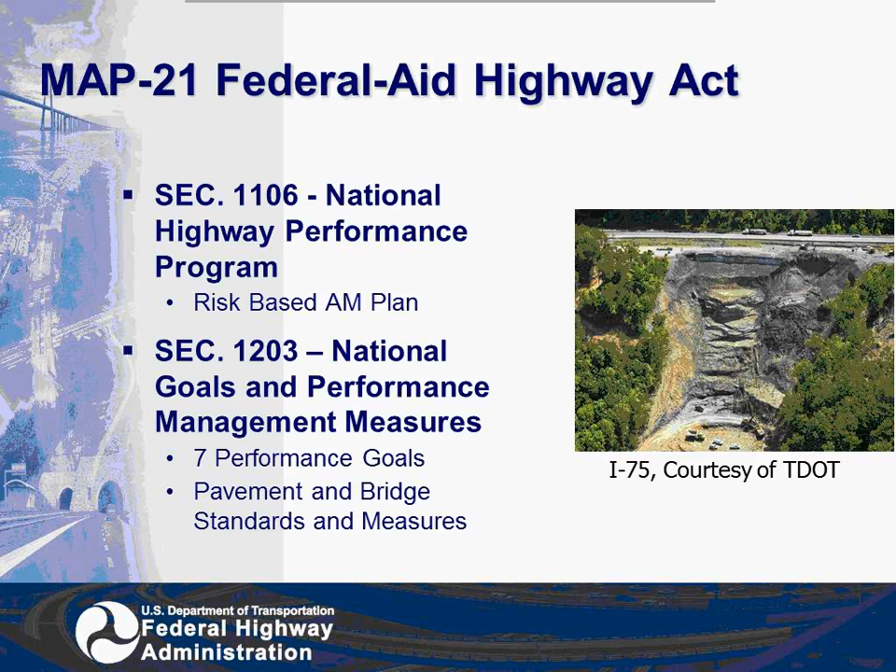We've been doing this a while with pavement and bridges. You could argue for a while about whether these are good measures, but we've been reporting—this is an old DOT report to Congress about conditions of these types of assets for some time. It's really a good thing the legislation didn't require something of geotechnical, because other than perhaps the design factor of safety, we don't have any standards and metrics that we could be working towards.

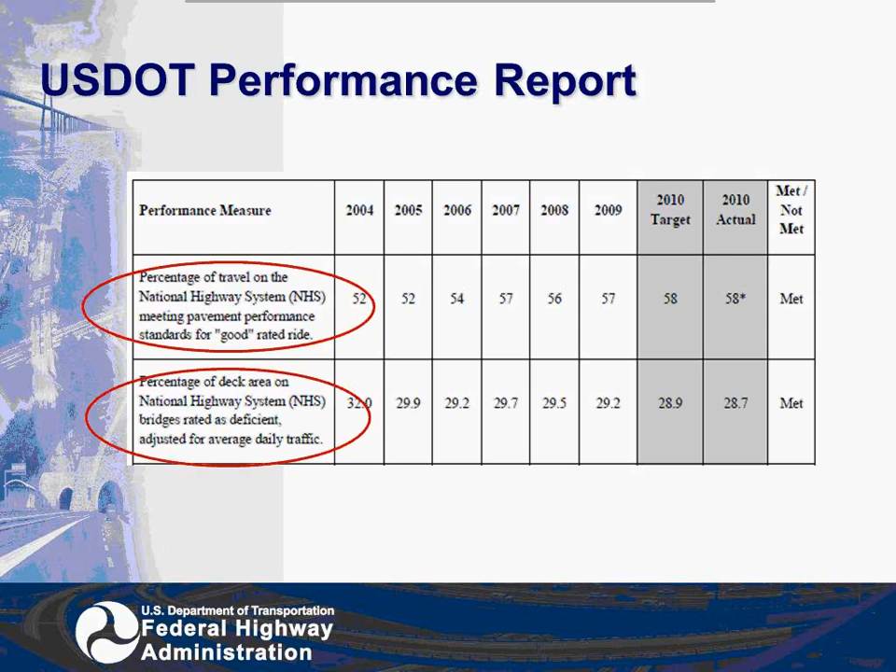I think it's also important to look at a little historical perspective of how we got here. Not all of these things came from the same place. If you look historically, back in '68, following the Silver Bridge failure in '67, the National Bridge Inventory was established. It was based on solving a safety issue first—to ensure we have safe bridges for the public. About 20 years later, ISTEA in '91 was the first pavement management, and that was a fiscal responsibility, recognizing there's a lot of money going into pavements and that we need to be especially careful in managing such a big dollar item. 20 years later or so again, here we are at MAP 21, and we're defining performance now. And performance is multifaceted—there are many goals.

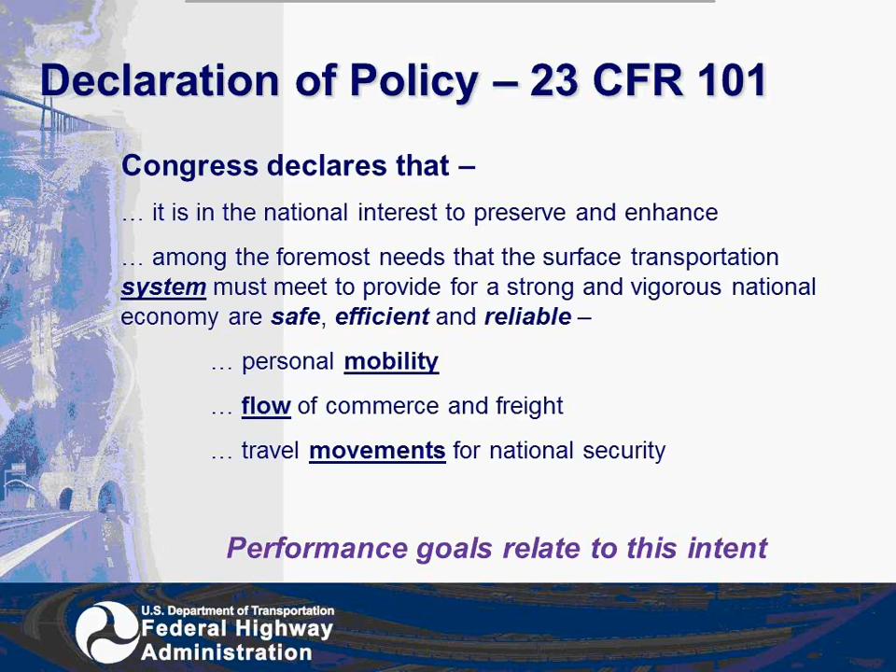So what's the intent here? This is Congress's language with my emphasis added. If you just look at the emphasized words, you can see that Congress has in mind a safe, efficient, and reliable system that helps mobility, its flow, its movements, and so on. The performance goals relate to this intent.

Risk causes these goals not to be met. The bridge and pavement measures can't do it all.

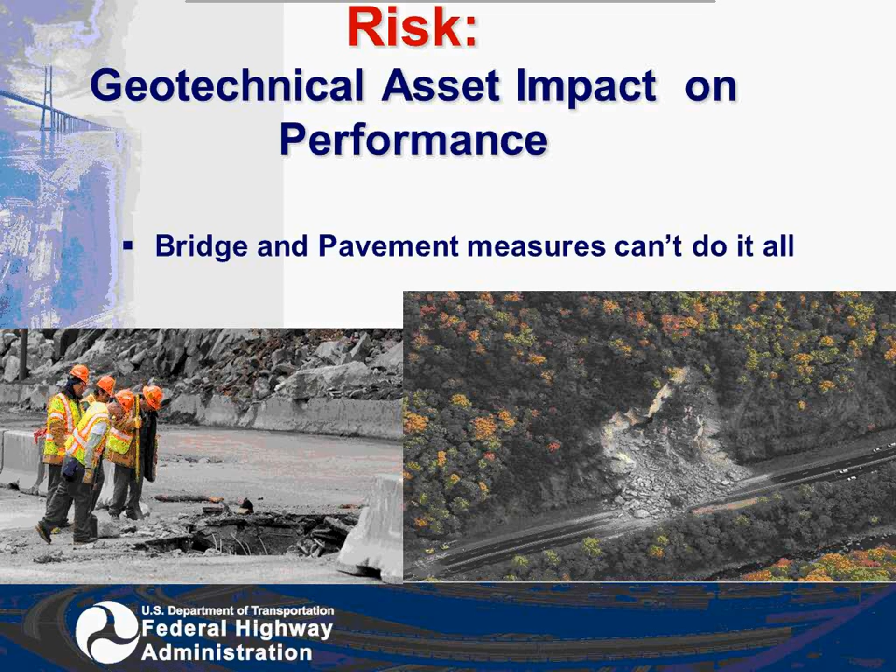This is I-40 in North Carolina. Again, pavement here might have been in fine condition until this rock slide came down. Both these corridors are now impassable, and that's clearly pretty poor performance.

This is an entire embankment section lost on, I believe, 441 in North Carolina at the Great Smoky Mountains, which actually provided access for Tennessee towns that thrive on the livelihood tourism brings there. Entire section lost.

Here's a tunnel that was discovered in Colorado just between Vail and Leadville in the peak tourist season. It fortunately daylighted just outside of the pavement section, but it goes right underneath the pavement, unknown until it surfaced.

Here's a retaining wall between US 6 on the left and I-70 above it, a wall that wasn't maintained or managed until it became such an issue that it required a $10 million repair that impacted both highways.

This slide from Taiwan a couple years ago maybe says it best. You've got tunnels at the very top of the pictures, plenty of bridge structures, embankments, other kinds of earthwork, and pavement in between, and it's quite clear this is not a viable transportation corridor.

So the thesis we're presenting today, by my talk and those that follow, is that systems for safe and efficient, reliable mobility are made up from corridors, and corridors are kind of a special asset because it's the management of a corridor that could ensure that the goals of MAP 21 are met.

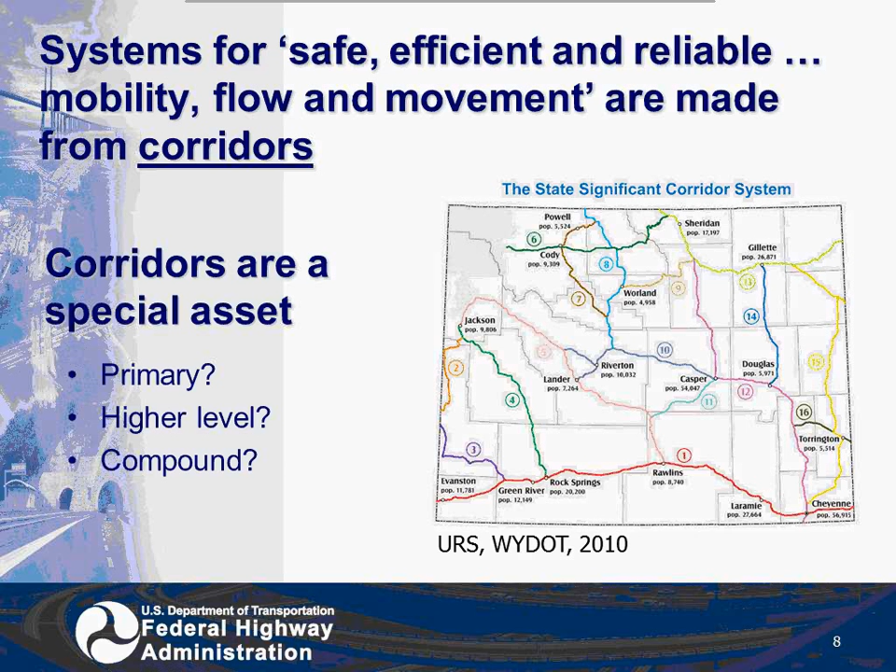It could ensure that we have this mobile system. Other assets can't quite get us there, so maybe it's a higher level asset, or you can call it what you will, but that's the idea. Systems are made up from these corridors as components. An example from Wyoming is shown.

So corridors are like chains. Each link is an asset, or maybe it could be called a feature or something like that. And of course, when a corridor crosses a valley or a ravine, it's crossed by a bridge structure, and in between it's got pavement types from A to B and B to C and so on.

But corridors also cross mountains, using cuts, fills, and retaining walls. And corridors also cross geohazards like sinkholes, abandoned mines, swelling soils, and collapsible soils. So corridors have a lot of different links to them, and corridors break like chains do as well.

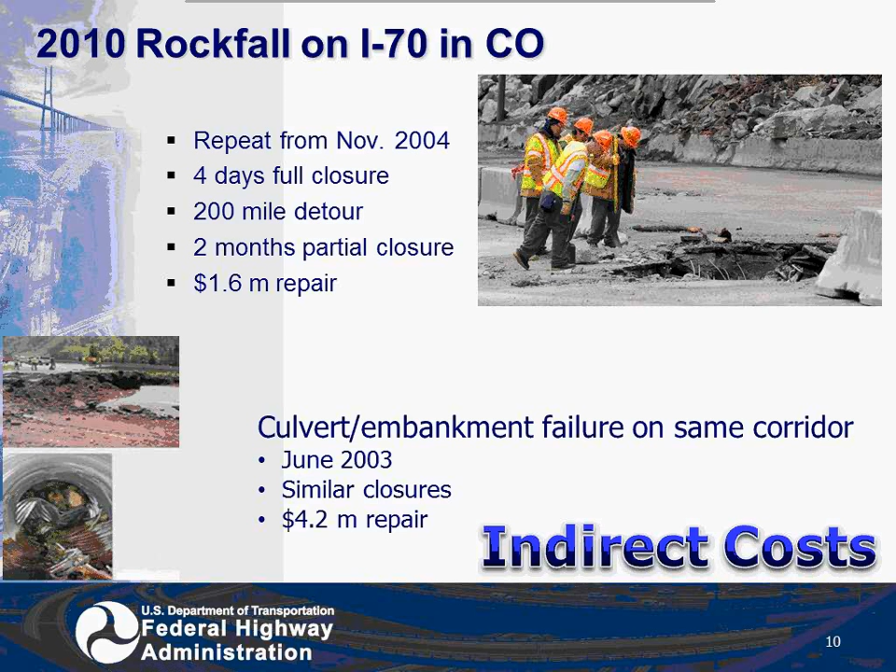Just a couple examples to show what we've learned about where the costs are here. This is I-70 again in Colorado. You've seen that upper picture, but the point on this slide is that I-70 in Colorado closes every few years because of a geotechnical, or let me say a non-pavement, non-bridge asset problem, and it closes the highway. CDOT estimates it costs about $800,000 a day to close the interstate.

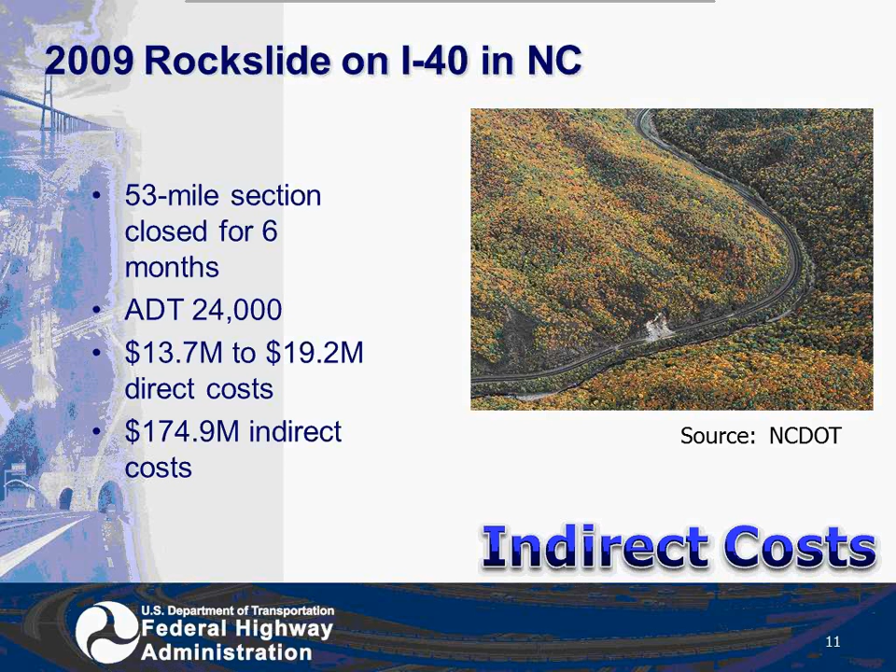In the 2009 rock slide on I-40 North Carolina, which you've seen this photo of as well, a little bit more in-depth study in terms of cost was done, and basically it works out to be about $1 million a day, even though this one has a lower ADT than I-70 in Colorado. So the failures are dramatic. They look like there'd be big safety issues, and when there are safety issues, they're tragic. But really the big deal is the cost of closing the system. And $1 million a day for an interstate...

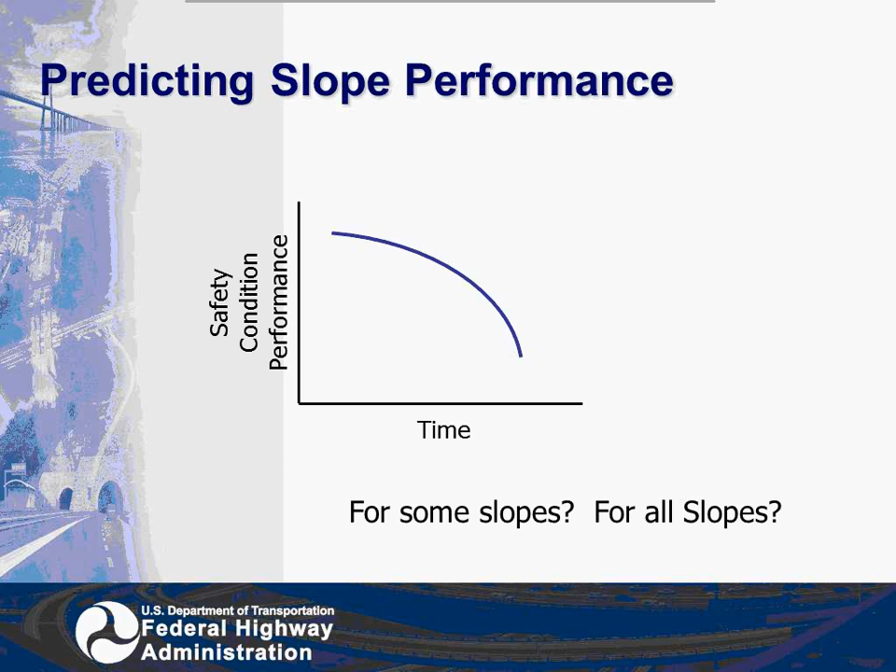Geotechnical issues that are related to inventories and definitions, forecasts and models, expectations for standards and measures, and we're going to learn from some experiences. We really have a lot we need to do. If you think about pavement, for example, most states have one or more of these types of pavement deterioration curves that they use to manage their pavements. We don't know, for example, if when we're looking at slopes, whether we have the same type of curve. Do we have it for all slopes? Do we have it for some slopes, some geologic settings, some climates, some aspects, etc.?

It may actually be that in predicting slope performance, the impact of natural events makes it a pretty noisy curve. It might have the same trend, but it might be hard to see the impacts of preservation activities in this type of relationship. This is what we need to learn.

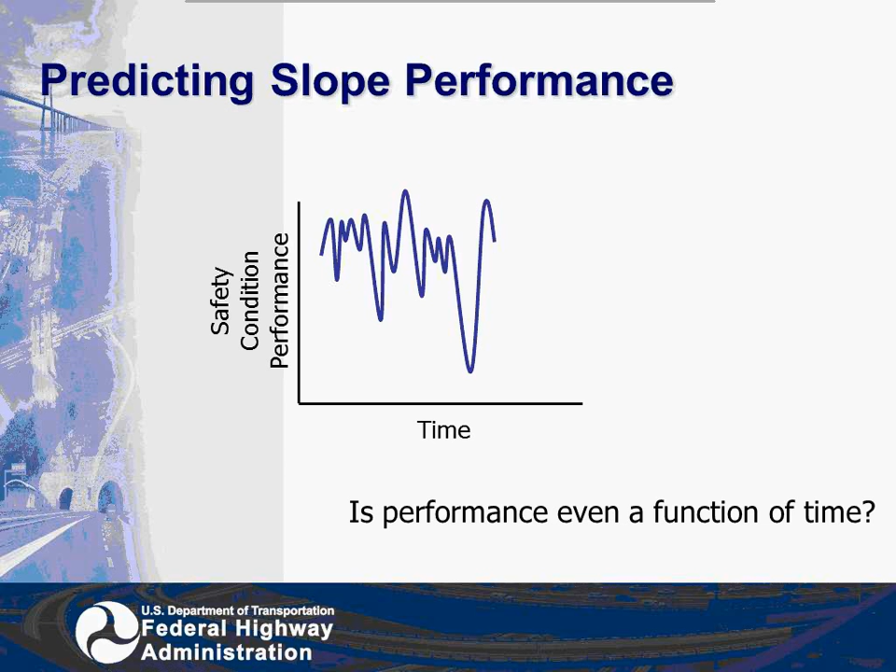It could actually be that extreme rare events really have a dominant influence on the way some of our geotechnical features perform, and that's also something we need to discover. In this case, we're really looking at the risk introduced by, you can easily picture it in terms of an earthquake or something like that. A recurrence interval type risk management approach is what would be required.

So what I want to leave you with today are some points to carry forward as we go through the following presentations. Corridors are built from links of a chain, and they are the real asset of a state highway agency or someone else who owns roadway systems. Geotechnical features are links in this corridor, and the system the owner has is built from a series of these corridors.

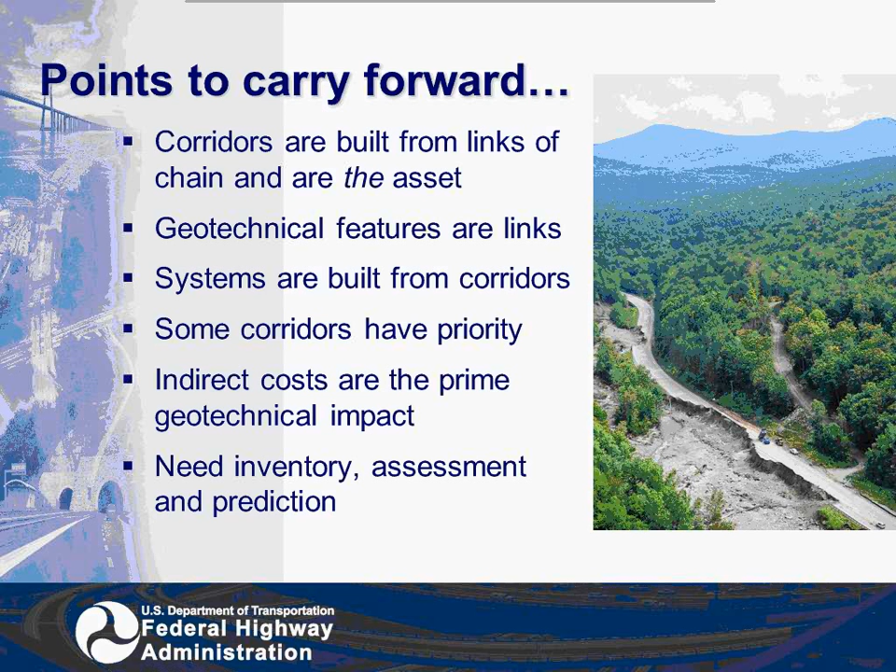Another important point here is that some corridors have priority. This matters because one of the challenges in managing geotechnical assets is the time-consuming business of getting inventory and condition assessment on these features, which heretofore haven't really been managed. Using the priority of corridor approach, one can start to do meaningful inventory and assessment work in a logical and risk-based way.

Indirect costs are the prime geotechnical impact. Despite the dramatic look of some of these things, really the issue is closing down the roads and impacting the environment we're in. Finally, I'll leave you with the idea that we need inventory assessment and prediction developments, and that's what I see as an important and exciting part of the geotechnical engineering future.

So this is what a roadmap could look like for GAM. It's a simplified version, but you can see there's a whole series of steps we will probably have to go through. As Scott mentioned, many of these GAM programs have been around for years and years. One great example is WSDOT's unstable slope management system, which Tom Badger will talk about in a little bit. But these predate TAM in many cases, and certainly GAM. So let's move on and talk about some of these key points.

These key issues - many of us are going to have to advocate to get a seat at the table with TAM. That's what's been going on with this group for the last couple of years, exploring what the role of GAM is and how to move forward. You may have to create a role for GAM in your agency, but it should not be a separate silo, rather integrated with the TAM development process.

How do you start? You can start by doing some research, and the best place is with the TAM guides that Matt mentioned earlier. These are easy to find, you shouldn't have trouble getting to those. As you move along, probably the very first step is to look at the 5 core questions for asset management that you can find in these guides.

The first question is: what's the current state of your physical assets? Where are you with locating these important assets and knowing the condition of them? Then you want to know what is the required level of service for these assets - what is it you want them to do? You can define this in pretty simple terms. For retaining walls, it's not too hard to think about what you want a retaining wall to do.

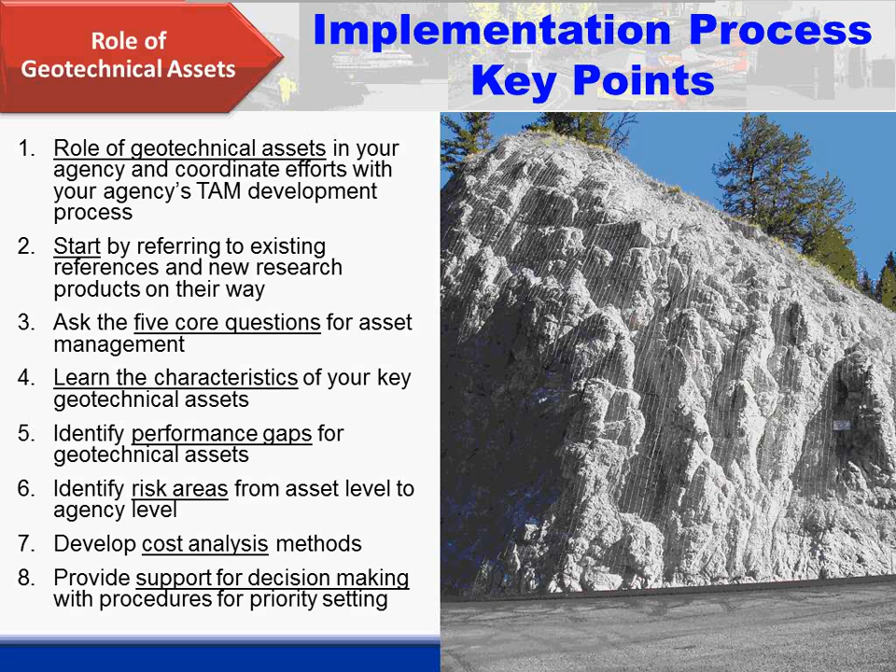The next step is learning the characteristics of your assets - this is the inventory stuff. Identifying what kind of performance gaps you have for these assets - do you have a whole class of retaining walls that aren't working the way you want them to? Then that segues into risk, and you need to identify risk areas for these assets. This can be low-level, asset level, and all the way up through the agency decision-making tree.

Cost analysis is going to be very important, and we're not very far along in understanding how to do that for geotechnical assets. The whole point of all this is decision support, so we need to come up with procedures to incorporate geotechnical assets into that process.

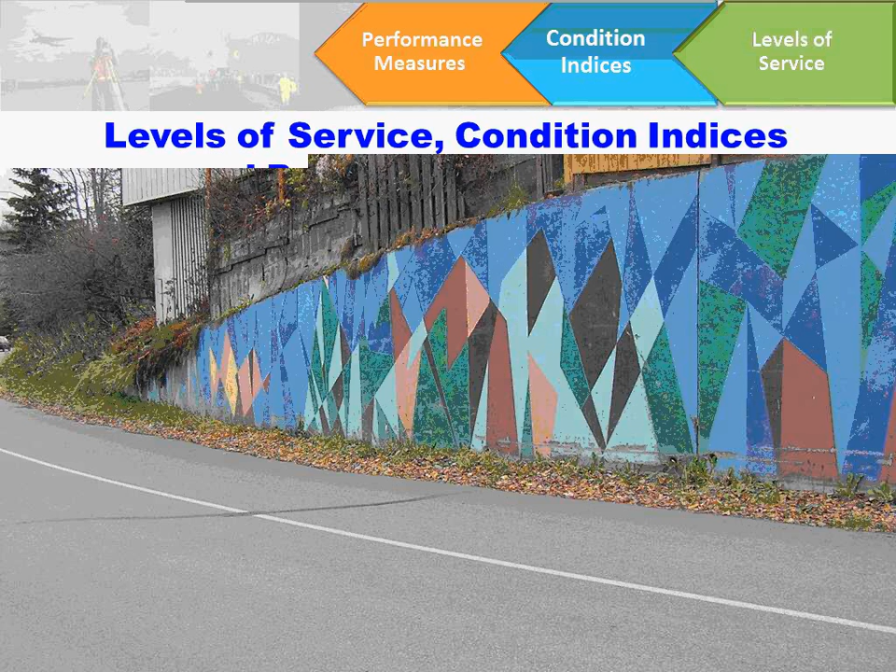Here's an example of a geotechnical asset - these retaining walls in Alaska. We don't even know where they are, much less what condition they're in. So we've started a retaining wall program, and we're going to start with inventorying them. But how do you assess the condition of this wall? Obviously the colorful part was built first, and then all this other stuff was added on top. So what's the current condition of this wall? What's the service level we're going to expect from it?

Based on its current condition, how much life does it have left? When are we going to program a replacement? These are all the kinds of questions you need to ask about many different kinds of geotechnical assets.

So these are key features: levels of service, condition indices, and performance measures. What are these things? Levels of service, again easily found in the TAM guides, are targets that the agency uses to describe a desired level of functionality. This can be some kind of maintenance and operations condition that you want to keep track of.

The next step is condition indices - basically a numerical scale applied to an asset condition. Often these conditions are based on observations, sometimes measurements, but often just observations. Examples include pavement roughness index, bridge condition, national bridge inventory, and unstable ratings, or unstable slope ratings for both risk and hazard. And the last one is the performance measures.

And what these do is represent how well an asset, or perhaps a grouping of assets in a corridor, are behaving, and whether the asset or corridor functionality is meeting the expectations of the agency and its customers and stakeholders.

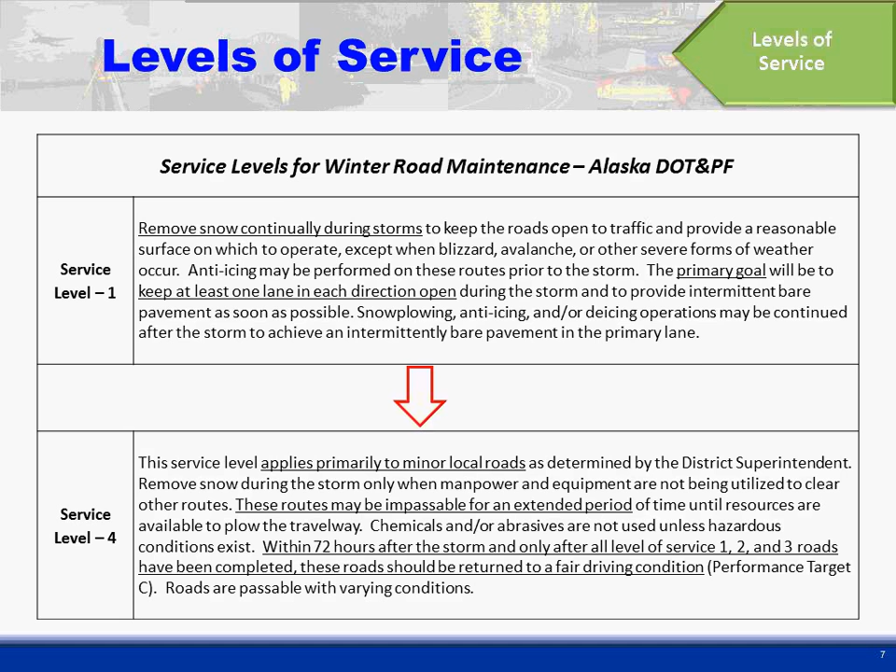This is an example of a level of service, and this is Alaska DOT winter road maintenance levels. The top one is the highest level, the best level, and it basically describes removing snow continuously during storms and keeping a lane open in each direction. And that can be pretty tricky in all of our snow states doing that kind of operations.

And then for lower level roads, here near the bottom, we've got some roads that could be impassable for extended periods during a storm. But they still have a goal, and in this case it's 72 hours, that the road should be returned to fair driving condition. So we've attached some numbers to this.

And probably in the beginning of this process for geotech assets, simpler might be better.

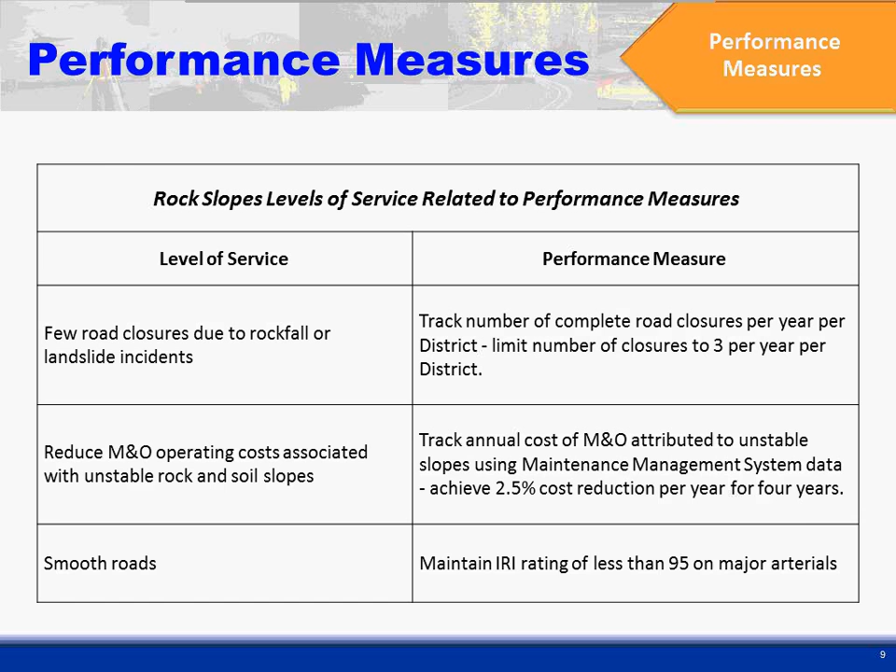So performance measures. Here we've attached, for rock slopes, levels of service and related those to a performance measure for that. These are simplified, but if you look at the top one, it's road closures due to rockfall or landslide incidents. And we can track that if we have a good relationship with our M&O people, and have a requirement to keep the limit, or to limit the number of closures to 3 a year per district. And we can track that and see how our maintenance forces are performing.

And at the bottom, it can be a little bit different kind. Level of service is just smooth roads. And we can check that with our IRI rating and pick a level that we want to meet.

And in Alaska, we're creating data web pages that have links to other databases. And I think that's a system that a lot of agencies could follow and already have done. Again, we're going to only look at these essential assets. We don't need to talk about sign reflectivity in this kind of system.

And I want to also make a point that all of the purpose of all this is to integrate all these things, the last things I talked about, service levels, condition indices, and these performance measures, so that we understand and assure that we're getting a performance of our corridor the way we want it.

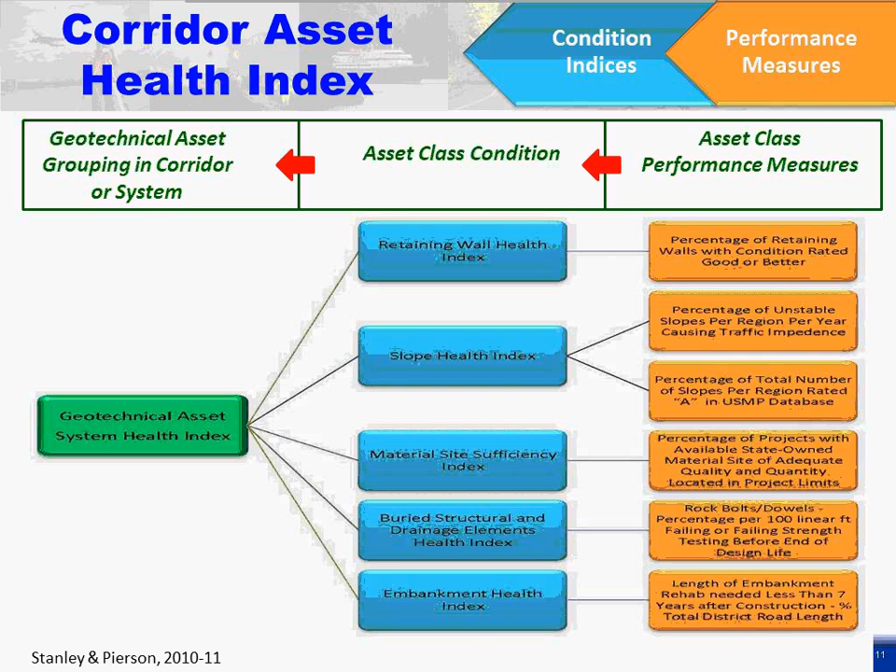And this is an illustration of how we can aggregate these things. And if we go from right to left in this, see on the right, the orange stuff is their performance measures for different kinds of asset classes, and whether it's retaining walls or unstable slopes.

And then we use the performance measures to create condition indices, which I'll just call a health index, or like in material sites, it would say material site sufficiency index. Doesn't really matter what we call it. The idea is you aggregate all these things together and weight them appropriately to get an overall rating for the corridor. Now this represents only geotechnical assets, but you can also add in other kinds of assets like bridges and pavements.

Okay, this is a flexible rockfall barrier, and just using this to introduce the topic of hazard and risk. Mark Vessely will be talking about this in a few minutes. And this is a fairly short barrier that's located in a very specific area of a pretty lengthy rock slope. And obviously there's a reason they built this thing here, but this kind of illustrates that not all geotechnical assets are made of rock and soil.

This is steel and concrete. There's wire mesh and cables and all kinds of elements here. And it's an adjunct, really, to the larger geotechnical asset, which is the slope. But why is it here?

Well, this is why it's here, because there's a whole bunch of more or less stationary assets at the bottom of the slope. Railroad tracks, there's a tourist train that stops there. The dock ends at the end of the picture down there, so nobody is going through here at a high rate of speed. And that kind of illustrates the point that location makes a difference.

What's the setting? Is it urban? Is it rural? Is there high ADT or low? All of these things are important, and we've got to develop a framework to incorporate all those things into a GAM program and a TAM program. Mark Vessely is doing some research with Shannon & Wilson for incorporating risk management into our geotechnical asset management program, which is also under development, and we can talk about that another time.

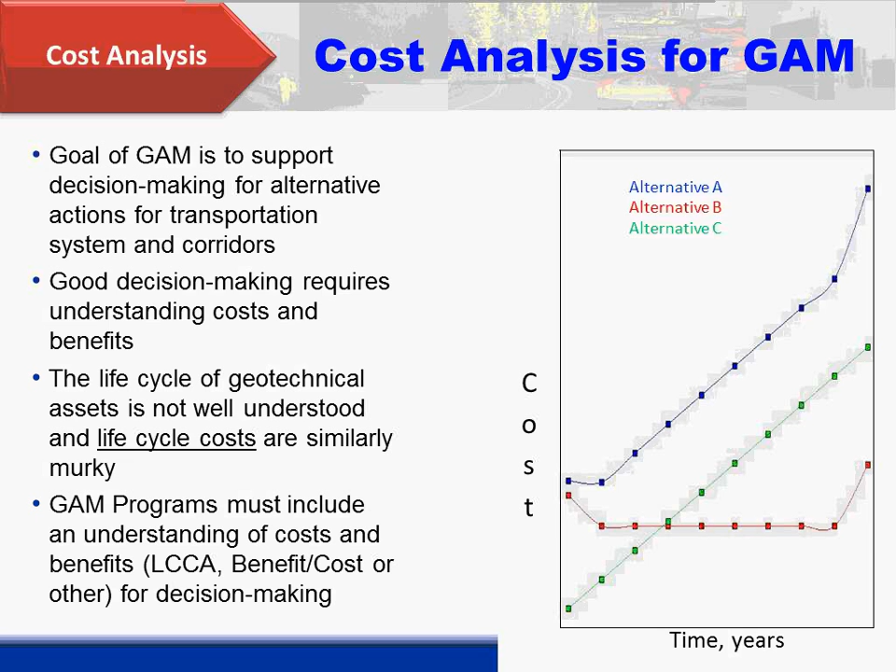Next slide, please. So now we're getting to the last topic, which is cost analysis for GAM. And again, the goal is to support decision making. So how do we do that? We have to understand the life cycle of our assets, because if we don't know that, then we can't put life cycle costs on it. And we're in a bit of a pickle right now with geotech assets because we just don't understand very well some of these assets in the life cycle. We have a lot of sort of intuitive knowledge, but we haven't really put numbers to a lot of these things, and that kind of research is underway.

So bottom line is we have to have that understanding. We have to be able to put numbers on it. We have to be able to put dollars on it so that we can participate in the decision-making process. Next slide, please.

I think a great example of this, that Tom Badger will talk about, is his unstable slope management program, where they actually do this benefit cost analysis to determine what projects are going to build. Okay, next slide, please.

So the takeaway is just get a start. There are lots of steps here, but make an effort to decide which assets are important, set up a data collection program, and start collecting inventory and condition data for these important assets. And as time goes by, we'll get better and better. Thank you for your attention.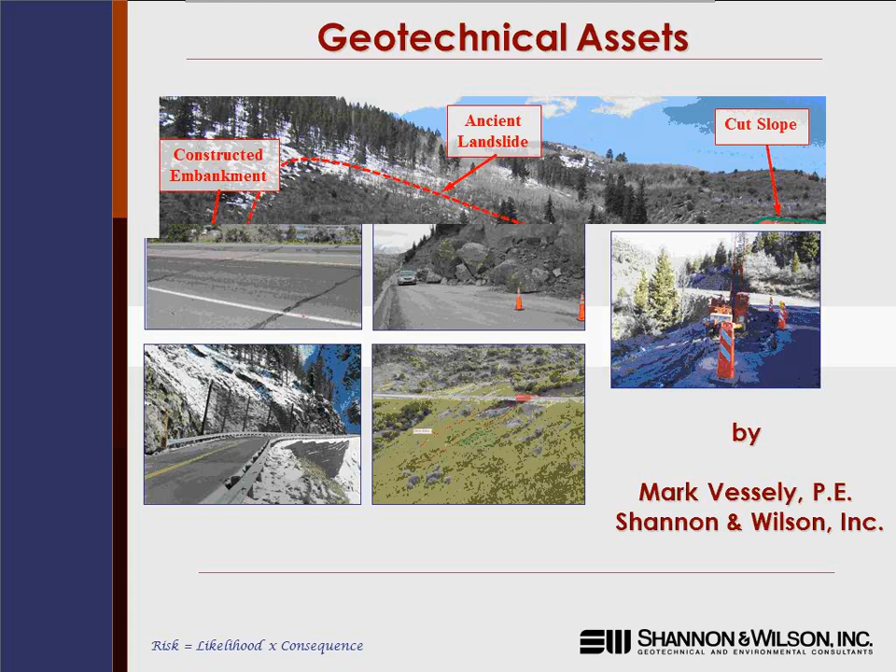So I'm here today to talk about how we can use risk-based methods to identify and manage some of these geotechnical features that we're here talking about, whether or not it's for a transportation owner or an agency. Scott and Dave both talked. Some of these photos here even show things like rockfall sites and barriers, pavement damage from unstable subgrades, landslides, things like that. And so, as we go to the next slide here, what are our geotechnical assets?

This is an interstate here in Colorado. We have the interstate highway up on the top of the embankment. We also have the U.S.

And state highway down below. This slide does a pretty good job of capturing the range of assets that might exist within a corridor, and they just happen to all show up here in one location. We have constructed embankments, historical landslides, new landslides, retaining walls, culverts, rock falls, several different types of features. I don't want to say this is the exhaustive list, but these are some of the types of geotechnical features or assets that we might consider.

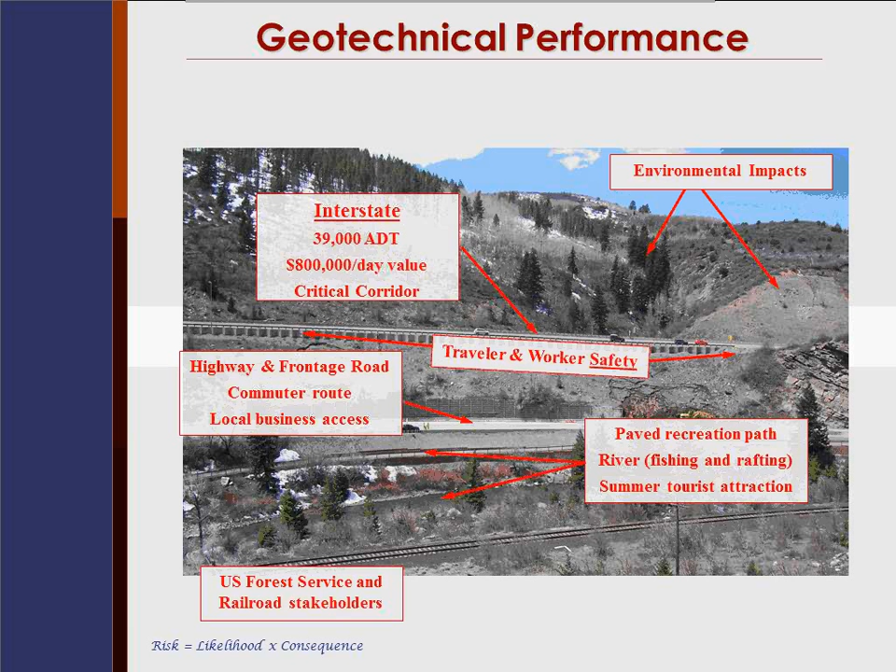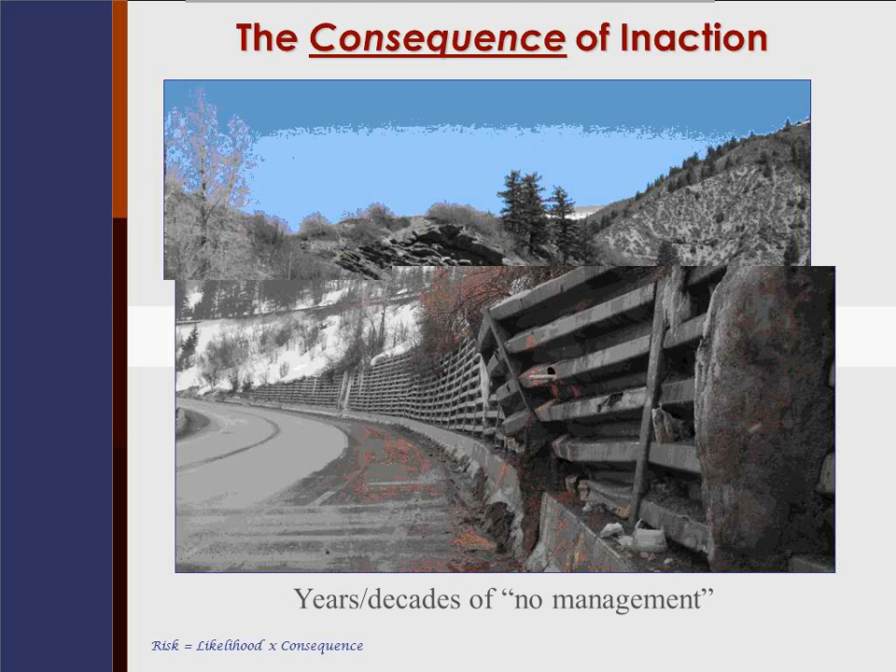Moving on, if we look at this with more of a performance context, we can see the role that the performance of these assets has. Scott mentioned Interstate 70 has roughly 40,000 cars and trucks a day, almost $1 million in economic value. We have traveler and worker safety for folks on the roadway, commuter routes, and a lot of recreation in this area, fishing, and those geotechnical assets all contribute to the ability for these to happen. Additionally, the DOT isn't necessarily the only property owner, so any negative performance can impact the U.S. Forest Service or railroad interests in the area.

This is the photo Scott showed, and this was a retaining wall within that slide—the middle bin wall. That wall was in this condition for several years. Unfortunately, there wasn't really any project in the area that could have addressed this, and as time went on, the wall never failed. If we think about the condition curve, it was relatively flat, it wasn't really changing, they measured it, it didn't move much, until 2008, a little higher precipitation that year—nothing too off the charts—and the wall does fail, and it fails suddenly. So in this case, the condition curve is almost more of a right angle downward.

By failing, the wall destabilized the constructed embankment above it, triggered a bunch of landsliding that eventually grew to threaten the interstate. The DOT ended up expending over $10 million to fix this. They closed the lower state highway for several months. There was environmental damage from stormwater and mud runoff. Also, this is an area where the DOT is trying to work with their stakeholders on improvements, and having buy-in from those stakeholders can be a challenge if you're having to take care of these issues.

Obviously, there are some major mobility and safety impacts—reputation, environmental concerns, and just to fix these, if you take out the economic cost, is pretty substantial. I think when you put the repair costs together with the economic costs, these costs can be several orders of magnitude greater than many of the other assets we are already managing in transportation asset management.

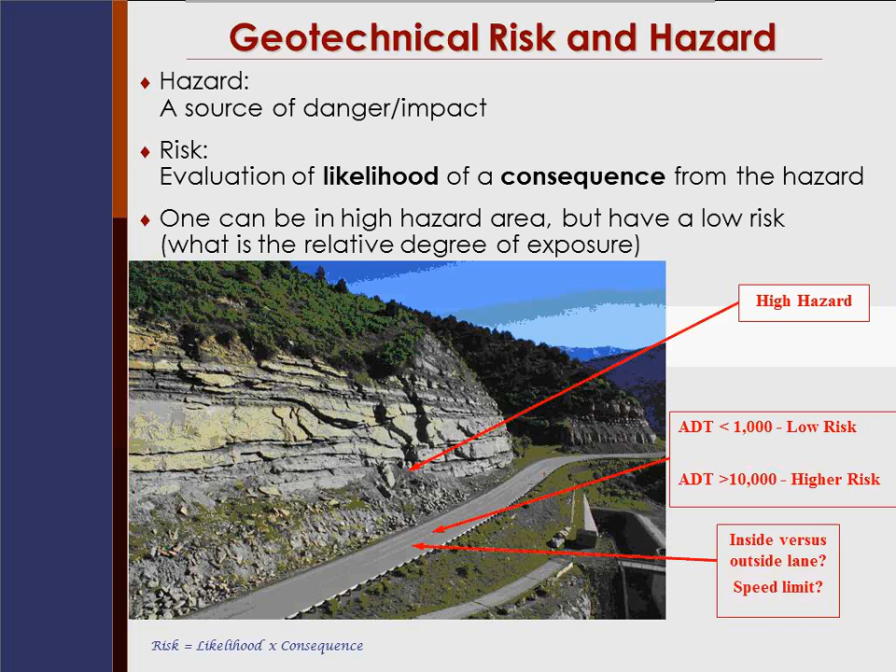As Dave mentioned, it's important as we do this analysis to distinguish between hazard and risk. When we talk risk, it's a formal definition where we're evaluating the likelihood and the consequence. This photo shows a high rockfall hazard site, but the risk is really related to the degree of exposure, which can vary depending on the amount of traffic in the area, maybe even where you're on the road, the speed limit. It's even further compounded by the fact that there's a Bureau of Reclamation dam and spillway right next door, on the right side of the photo. So those are all contributors to the risk evaluation we need to do.

That last slide shows one specific site or project, but what needs to be recognized is how risk can propagate through an organization. While that individual rockfall site may have a fixed mitigation cost or an engineering and maintenance need, it also presents a financial risk to the corridor or the management program, and often in an unplanned nature.

Additionally, as we mentioned before, there's political or reputation impacts if the DOT is viewed by their stakeholders as not able to maintain the roads in an acceptable condition. So as we do these risk analyses, we need to recognize that risk is going to be observed and measured differently throughout the organization.

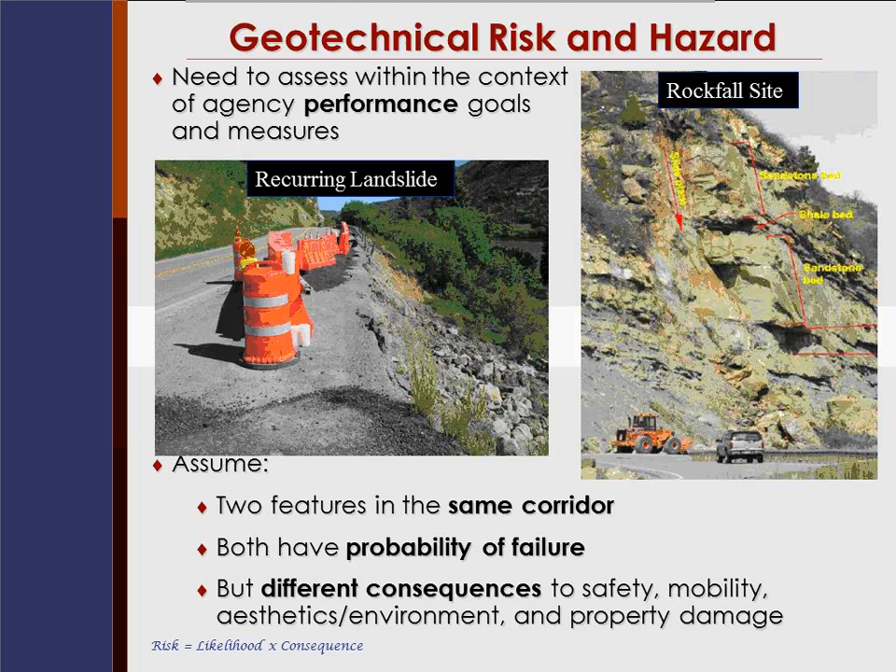Now, as we look at doing this risk assessment, it's important that we do it in the context of the agency performance goals. The slide on the left is a landslide. These two sites, the two pictures in this slide, are roughly a mile apart, and the landslides in this area oftentimes will happen on the order of maybe 10 to 20 years. They might remove the road from service for a couple weeks at a time. So there's obviously some significant mobility costs, mobility impacts and repair costs, but the safety risk might be relatively low.

However, if we're concerned about safety, the rockfall site, those failures and incidents can happen routinely on an annual basis. The repair costs actually might be relatively lower, but the safety risk is obviously higher.

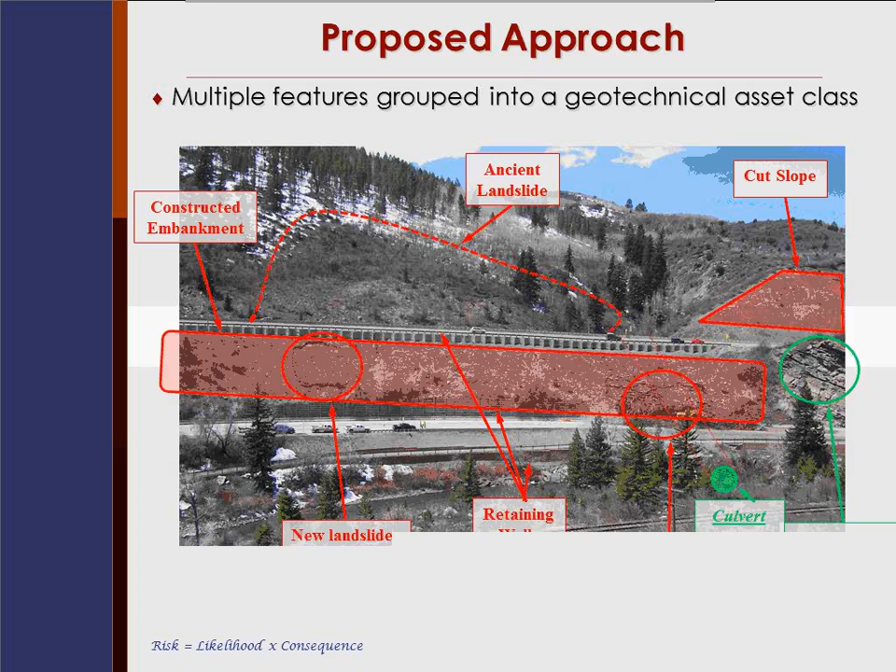So moving on to the proposed approach, as Scott and David both referenced, there's a lot of features out there that we can consider, and from our perspective, it's important that we group things into a geotechnical class. Not all walls, not all rockfall sites, not all landslides are going to have the same level of risk. By using risk, we can focus on the assets that are most critical to performance. And to take that to the next step, we need well-defined performance measures so we can perform this risk analysis in the proper framework.

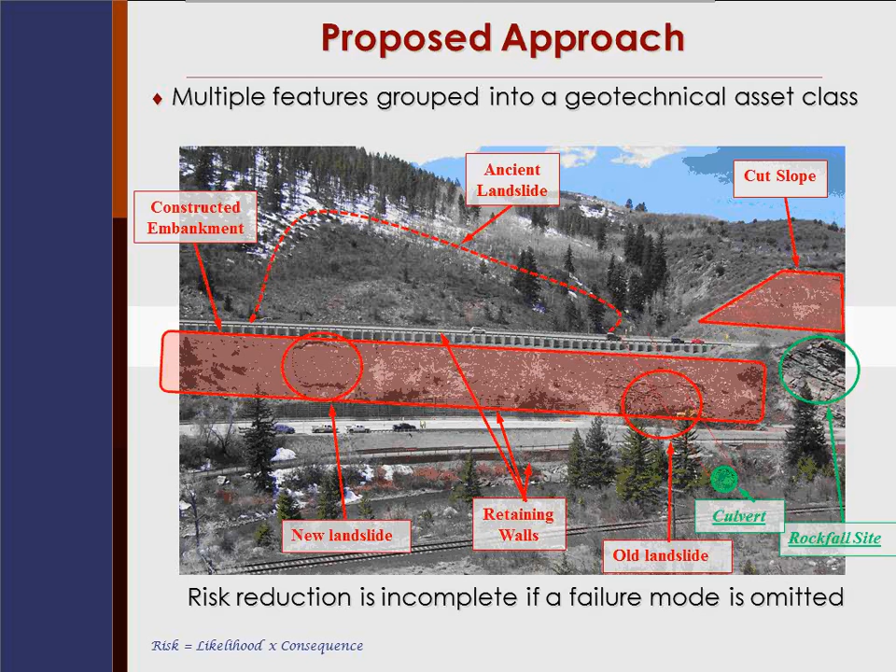So if we go back to this introductory slide, in this situation, on the lower right there's a rockfall site and a culvert, and at the time of this event, these were the two features that were managed within the DOT. However, neither one of them contributed to the need for the $10 million repair or the retaining wall failure. This is where, by grouping features into a geotechnical class and evaluating the corridor or a section of highway for the features that generate the highest risk, is important, because as this slide shows, just because we manage something, the reduction in risk that can occur might be incomplete if we leave something out. So it's important to consider everything, and a geotechnical asset class is the way we can do that.

So why do we want to do risk-based analysis? First, it's part of the TAM process to begin with, and what we're proposing here is that this moves the risk-based approach a little further up in the steps within a transportation asset management plan, and it allows us to maybe gain some efficiencies in the inventory and the assessment. Also, as we've heard already today, there's a lot of uncertainty with Earth systems. We might not even know what we have, and so given the uncertainty and variability, risk is a well-established tool that we can adapt from other industries and market sectors to our benefit.

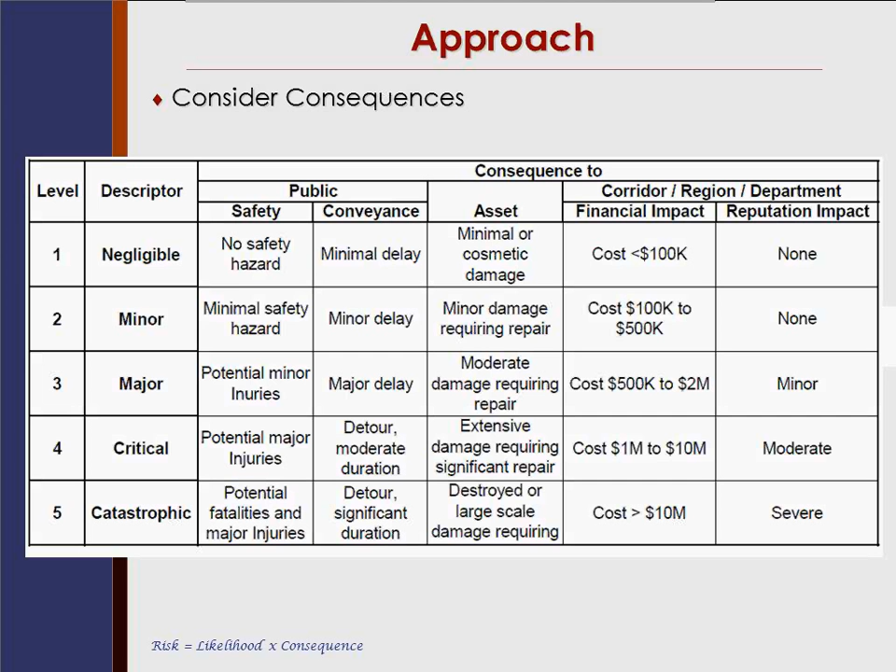So moving on to the approach, initially we might want to start with an initial qualitative assessment, and this can maybe be a little simpler. Again, this is to capture some efficiencies. Maybe instead of inventorying all retaining walls to the same level of detail, maybe we want to focus just on the type of feature, maybe where it is, establish some sort of relative condition, almost maybe a 1 through 5 scale. And then this is where we want to bring in our consequence and failure scenarios, again doing this on more of a qualitative basis.

Now the next slide shows what a consequence evaluation might look like. It's important here that what we're trying to do is capture the propagation that this risk has through the agency—whether we're looking at mobility and safety, or just the physical costs, or even some of the more reputation or higher level management risks that might be perceived. And we're really just trying to capture a relative ranking here, 1 through 5.

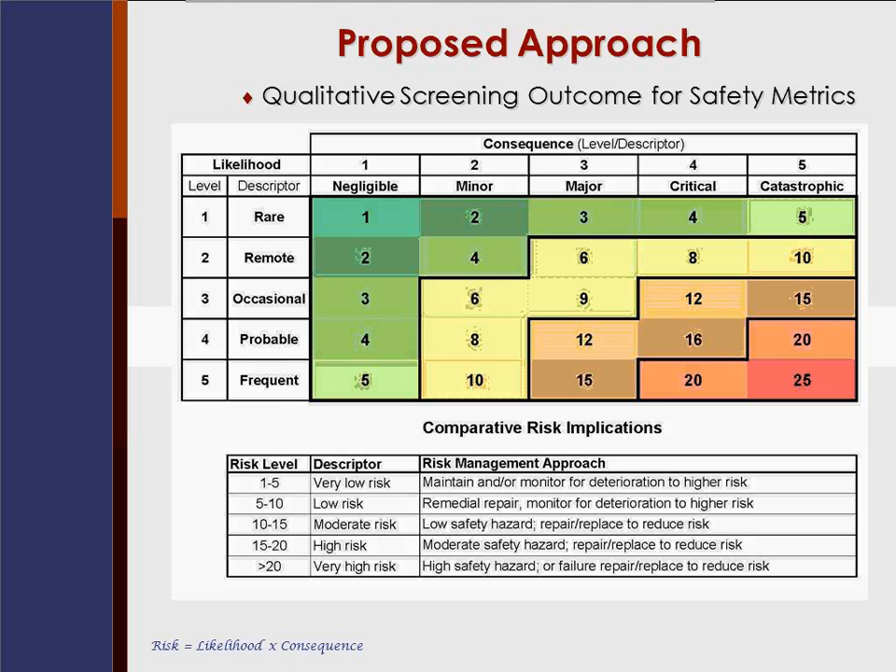We can also do this with the likelihood or probability assessment. Again, we're just trying to capture in a relatively efficient and rapid manner, if we're looking at a geotechnical feature, to screen it: is this something that happens once or twice a year, or is this something that maybe only happens once in everyone's career, or even greater than that?

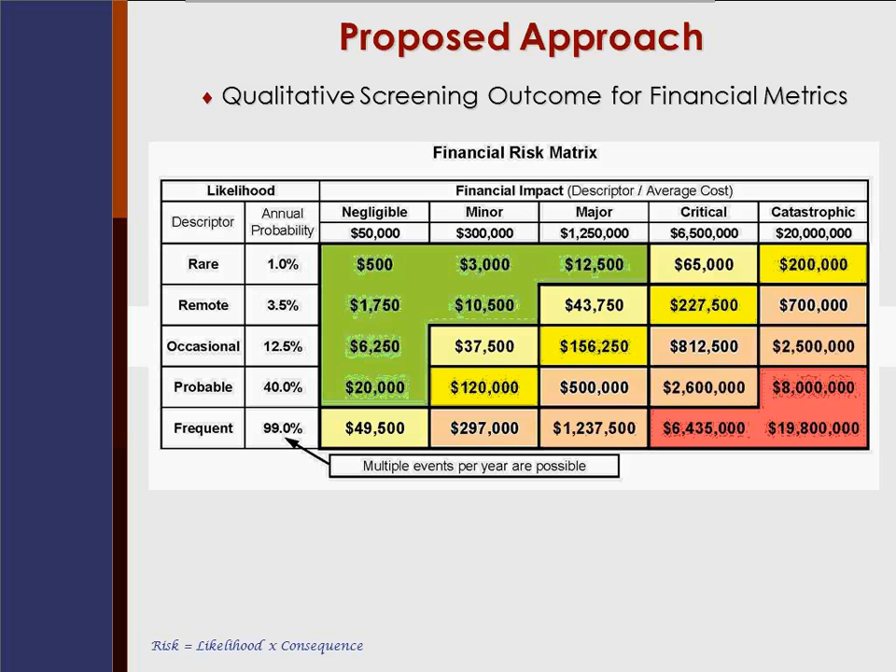As we go through this process, we can have a whole stream of different features - walls, embankments, landslides, all of that - and we can do this initial qualitative screening. This is where our performance measures come into play. For the DOT or owner concerned with a certain safety metric they want to target, we can perform the screening looking at the features that present the highest risk level, the red areas we see in the lower right.

However, as the next slide shows, we can also look at this from a financial standpoint, and we can do both - it's not one or the other. We can be looking at safety and financial impacts when we do this analysis, because it's important to recognize that some sites might have relatively low or remote safety risk, but significant financial risk. That's where the agency or owner's performance measures come into play.

As we continue this analysis within a geotechnical asset class - say you have a landslide, a culvert, a wall, and a rockfall site - now we can start going through some management scenarios, ranging from no improvement to different levels of mitigation and maintenance. We can estimate the relative success of those and the costs associated, both for the initial action and the life cycle, to do some of what Dave's slides talked about, looking at life cycle analysis as a means to guide the geotechnical asset management plan.

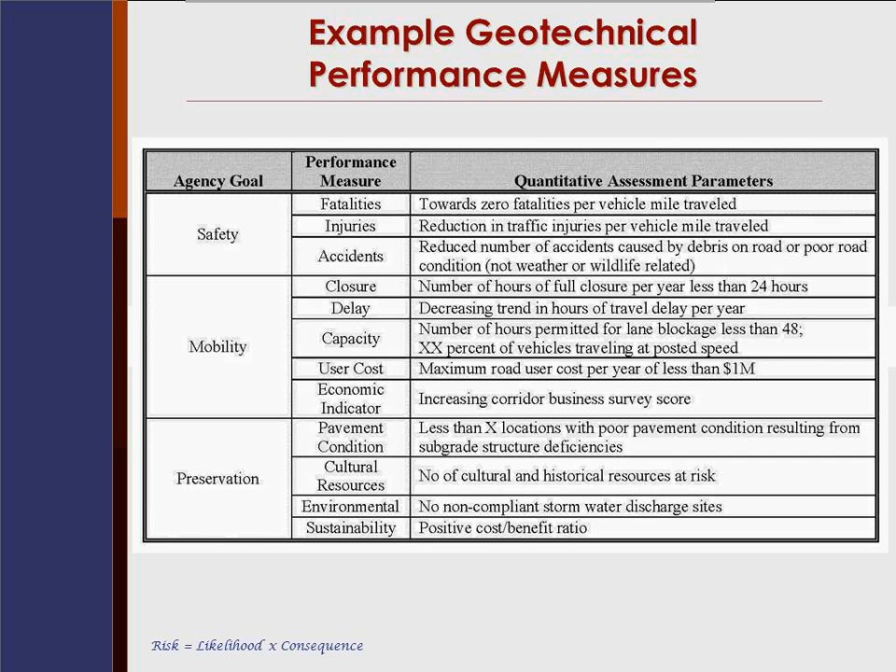Finally, as we pull all this together, we really want to be focusing on the agency or owner's transportation asset management plan or their goals. Some of those goals might be bigger issues such as safety and mobility, with performance measures established within those goals. So if the agency has a goal to work towards zero fatalities per vehicle mile traveled, we can do the risk-based analysis, identify the sites that establish the highest risk, and then look at management scenarios to help meet that transportation asset management goal.

Same thing with closure - Scott mentioned I-70 in Colorado, which has a pretty good history of being closed for a couple days at a time. So if the goal is to reduce those hours of closure, we can look at the geotechnical assets or features that may present the greatest risk of something like that happening.

As we wrap up, there's a pretty good database on risk-based practices from other industries and agencies, so we can use these practices to efficiently identify and manage the geotechnical features, many of which we're talking about today. As Dave indicates, there's no reason to wait - there's a cost of inaction. While doing some work for Federal Lands Highway, I came across studies indicating that in the United Kingdom they were able to document 10 to 20% savings over the life cycle of railroad and motorway embankments when doing asset management.

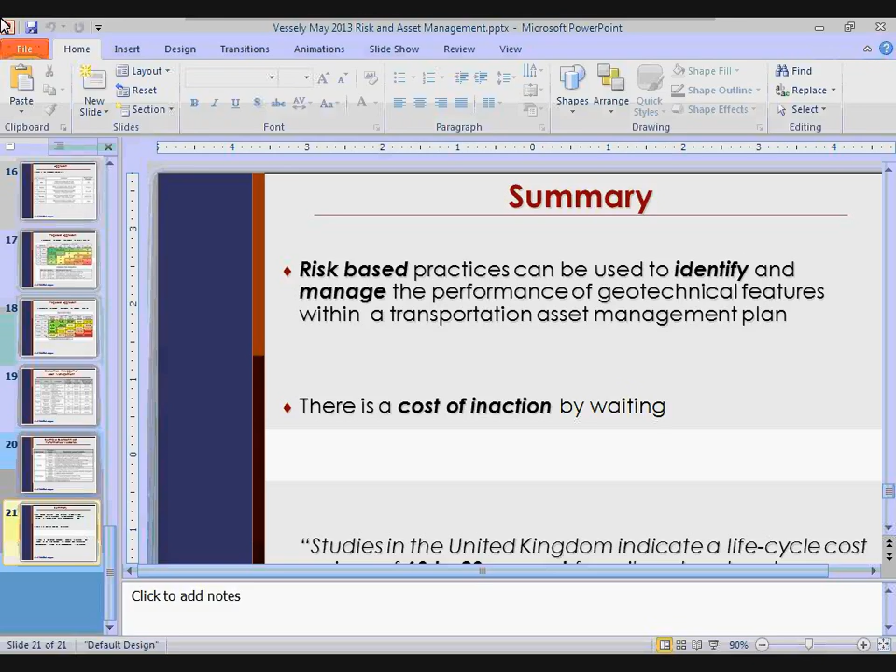At first when we saw that statistic, we thought maybe there was a little bias or it was a little inflated, but if you go back to that initial slide with the retaining wall that led to a $10 million fix, it's easy to see how that could be a very likely possibility. So with that, that does it. Thank you.

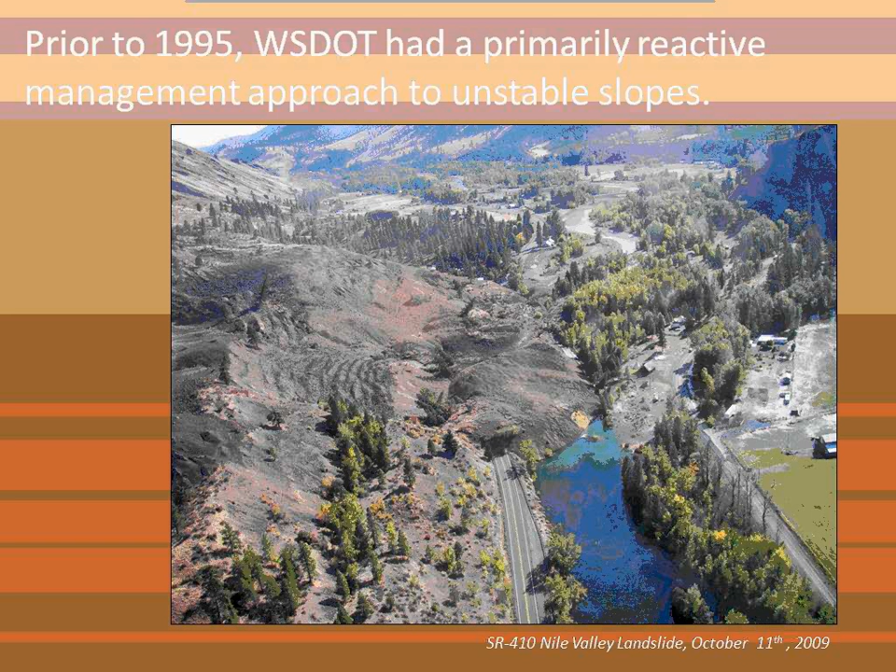Here in Washington, we are fortunate, I suppose, to have an abundance of slope hazards that create lots of problems or impacts on our highways, including landslides, rockfall, debris flows, erosion problems, and the like. So this presentation is just to revisit some of the experience we've had over the last 20 years of implementing this program, some of the lessons learned in Washington State.

I would start by saying that prior to 1995, when we implemented this program, we pretty much had a reactive management approach to unstable slopes.

So 1995 was sort of a watershed time in our agency. The development of the unstable slope system was a new part of a new project programming approach implemented in our agency for the highway construction program. The approach involved prioritizing and programming projects based on the extent to which they addressed highway deficiencies.

Unstable slopes was one of those identified as a deficient area, and that was included in our preservation program. There was a preliminary estimate made that the funding needs for that, if we assume a 20-year program life, might be on the order of about $300 million. So a substantial amount of money just to get this going and to commit to.

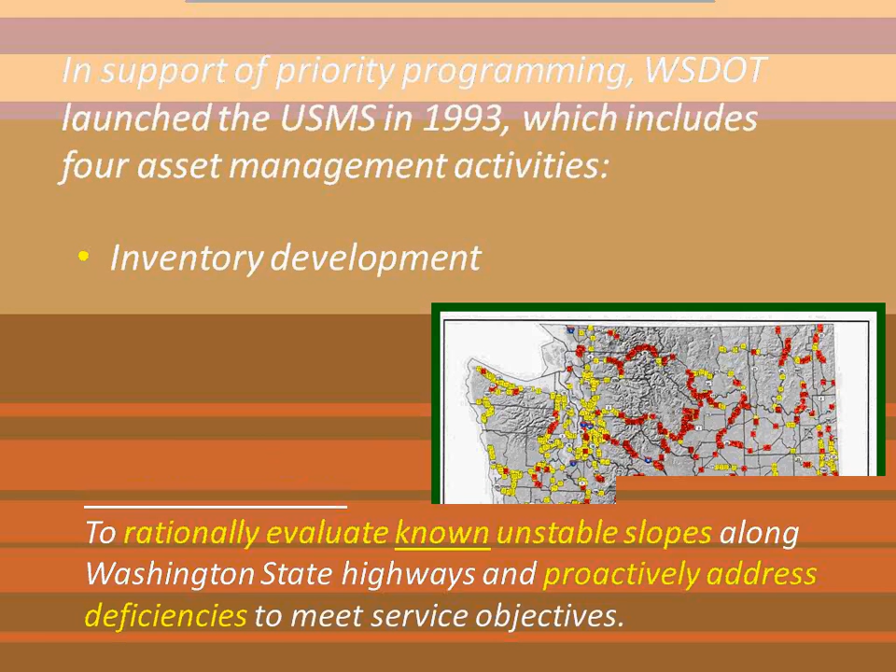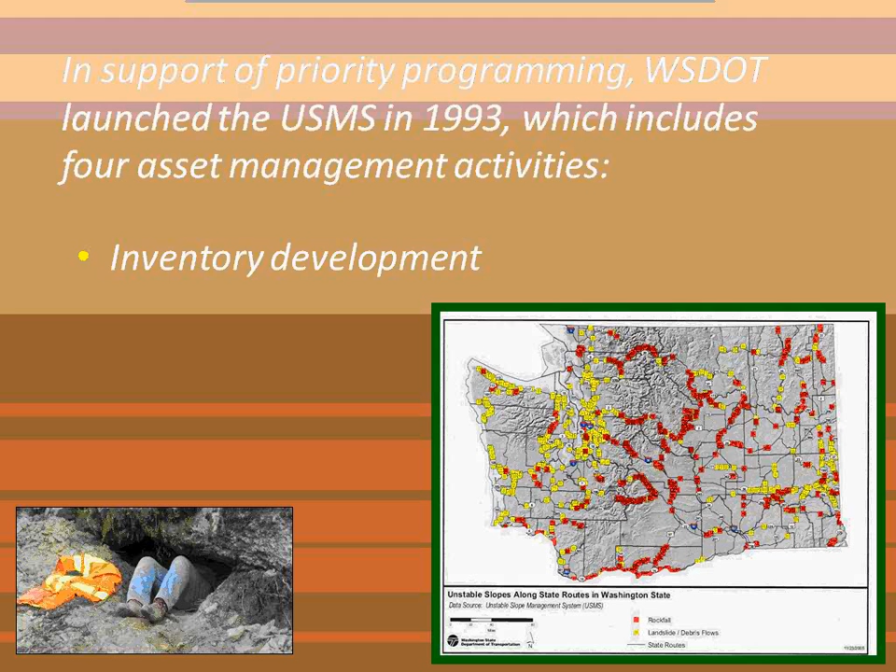The program was such that, unlike a lot of rock slope management programs implemented across the country and elsewhere, we were going to consider all slope type problems that impacted our highways, so landslides, debris flows, settlement problems. If I could craft a mission statement around that, the idea was to rationally evaluate known unstable slopes. We're not going out to look for new problems; we have plenty of existing ones, and to try and proactively address these deficiencies.

There are four main management activities that were implemented beginning in '93 to get this going. First was to develop an inventory. You're looking here at a GIS map of a number of sites around the state. We have about 3,000 or so unstable slopes that fall into those four or five types of slope hazards.

After we developed that initial inventory, there was a big effort to do detailed ranking. This is our data sheet that we use to develop a hazard/risk ranking, with about 10 or 11 criteria that we look at. Some fields are more risk-based, and one or two are more hazard-based, and that gets us a number, a hazard rating or a risk rating number.

Next slide. Are you there, Matt? Yeah, or is it not coming? I've got things switching on my end. Not for me. Okay, so I'll just work off this other one then. It's project scoping. Okay, let me get there.

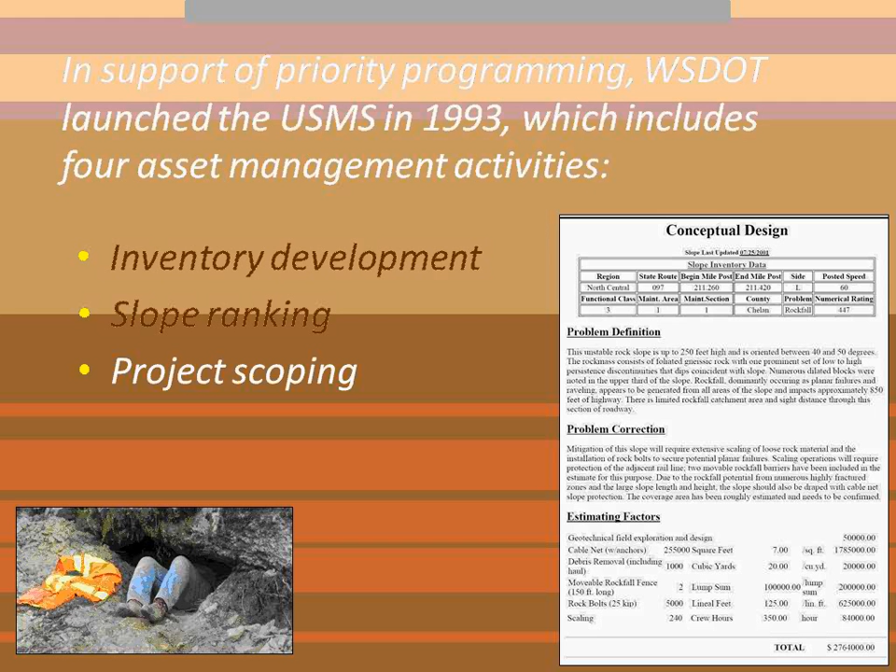So project scoping, the next part of this was, if we were going to build a program of slopes that we were going to mitigate, we needed some cost estimating of those. We used these risk-based rating numbers to glean off higher rated slopes, and did detailed scoping on these with our geotechnical folks, identifying rough costs for mitigation, whether it was drapery systems or buttresses or drains and the like. Those cost estimates were used for the next phase.

Next is the activity of prioritizing slopes. So we have 3,000 slopes, and we need to come to some logical basis to develop a prioritized list for our highway construction program. There's a couple of activities around that.

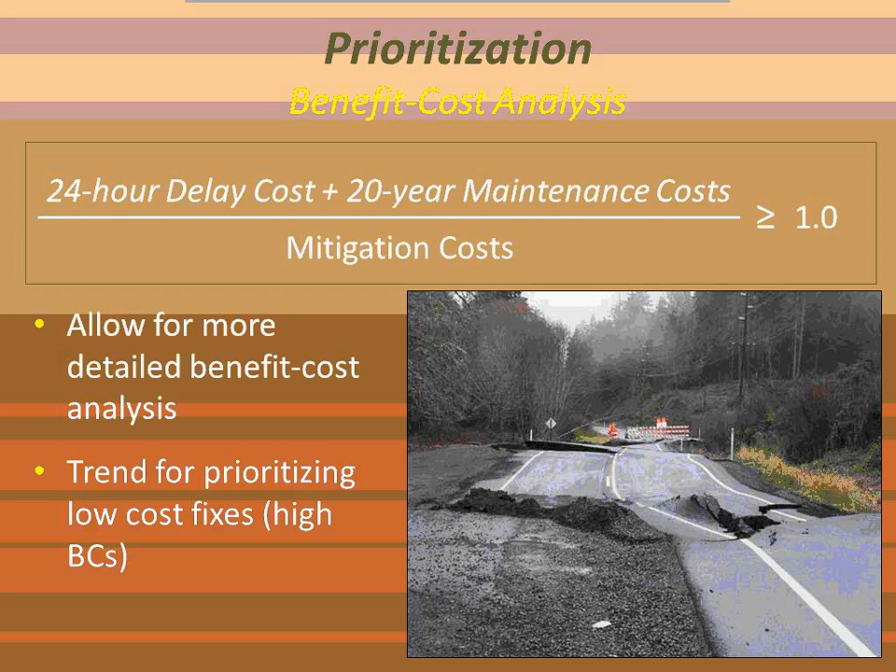We implemented a benefit cost analysis that considers a delay cost. We assumed for any slope we were looking at, say a 24-hour closure, and added those costs to the maintenance costs for maintaining the unstable slope problems associated with that, then balanced those costs against what it would cost to fully mitigate the problem. If the costs to mitigate were less than these delay and maintenance costs, we would achieve a favorable benefit cost ratio, and that allowed a slope to advance for future programming.

Now, we do consider on certain site-specific projects more detailed benefit cost analysis. This is a very simplified one. But one of the things we recognized is that lower cost fixes are going to quickly rise to the top, generating higher benefit cost ratios.

So that gets us to the part of how do we program these. In the beginning, it was decided we were not going to pursue a worst-first programming approach. We weren't going to take the highest rated slope and fix that, for instance, if it was on a low ADT facility compared to something lower rated but on an interstate. So the criteria we developed, used up until about 2009, was...

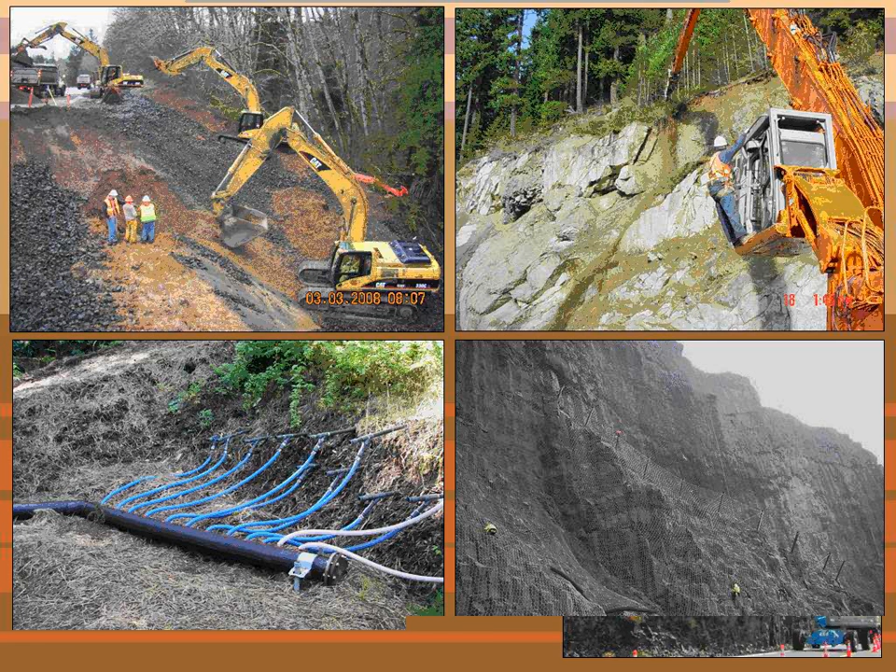We were going to focus on interstate and principal arterials with ADTs greater than 6,000 vehicles. We were going to glean from these higher rated slopes, 350 points and above, and the other critical portion was that they had a benefit cost ratio of 1 or greater. So that got us to about 2009 — we'd gotten through a lot of projects on that first cut of slopes.

Since 2009, we've been looking at lower volume facilities down to ADTs of about 1,000. We lowered the risk rating threshold, but still require favorable cost benefits.

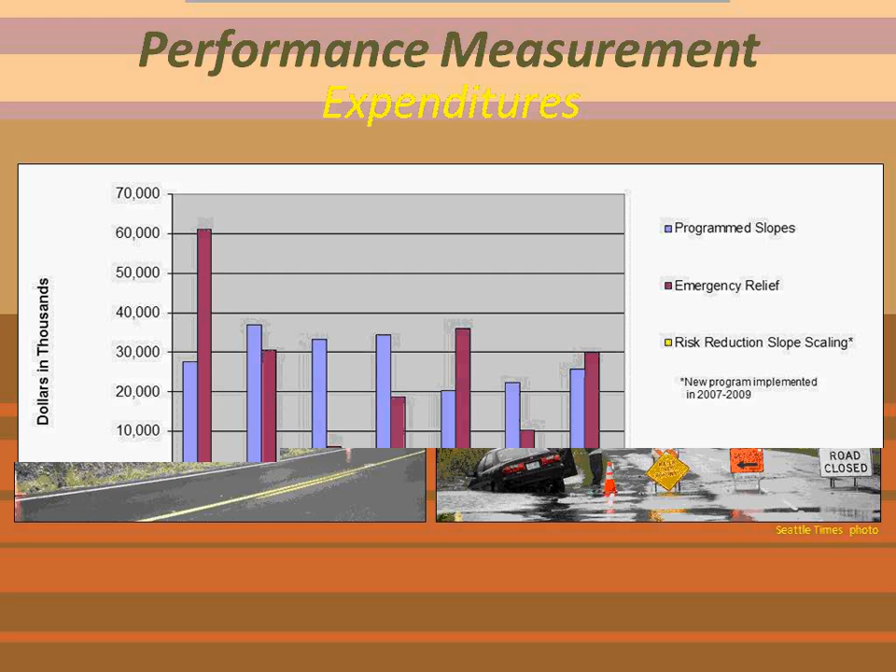Next slide. So since 1995, we have fixed lots of slopes. We've done a lot of landslide stabilization projects — oops, can you go back one? — done a lot of scaling work and installed drains and the like. And now we've got lots of constructed assets out there.

So next slide. The question now, as we get towards the end of our anticipated program cycle of this initial 20 years, is how have we done? Have we fixed the problems of the slope areas we've identified, or are we still having deficiencies in terms of these slope-related impacts? So let's talk about expenditures.

This graph shows expenses paid per biennium since 1997, when we started actually building projects, through 2011. The purple bars are program slopes — you can see we're programming about $20 or $30 million per biennium in that range. The maroon or burgundy colored ones are emergent slopes, ones that were either not anticipated, not captured in the database, or didn't get programmed for whatever reason. So that's what we've spent so far.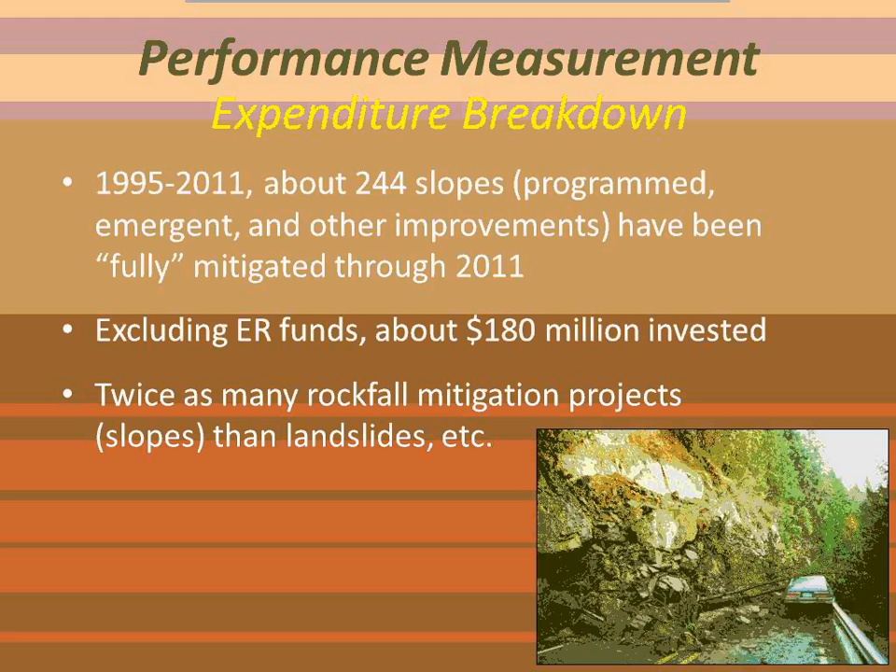Next slide. In terms of those expenditures, we've fixed maybe close to 10% of the slopes in our database, about 250 slopes. These have been fixed either through this programming method or as an emergent need. Some others come in from other safety or highway improvement type projects, but that's what's gotten done so far. To date, just through the program bucket of money, we've spent about $180 million.

And if we compare the types of problems we've fixed over this time, we've done about twice as many rockfall mitigation projects as other types of hazards. The reason is these unstable slope projects, rockfall in particular, are often less expensive to fix — they have higher benefit costs than landslides in general.

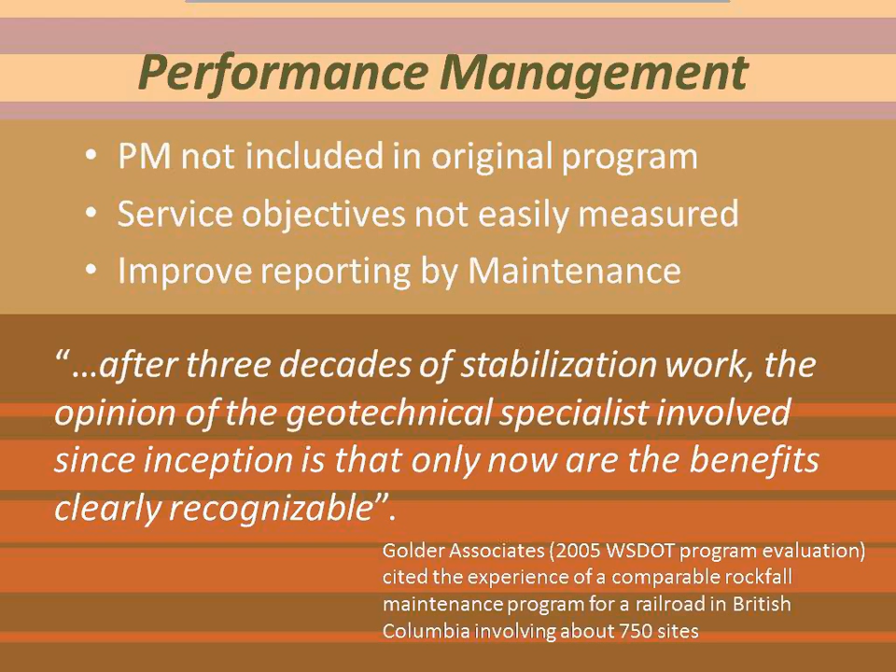So next, if we reflect on the performance aspects of what we've done in the last two decades, I'd say first off we really didn't have any sort of metric for performance management, and we're recognizing that right now. We also recognize a lot of the service objectives around unstable slopes aren't easily measured. For instance, how well did we do at keeping rocks off the highway — we really need information from our maintenance people to tell us that, and that's something we're working on improving. This is a way for us to improve our sense of measuring these benefits.

I put a quote in here from a report we commissioned by Golder back in 2005. They were citing the experience of another geotech up in BC — who'd been working on a similar program for a railroad up there. The quote is that after three decades of stabilization work, it was the opinion that only now, after three decades since inception, are benefits being recognized. So the point is that this is a long haul, a long vision type of commitment to see benefits in a system like a highway transportation agency. Next.

Another new twist that came in 2007 is we recognized that a lot of these lower risk but still significant hazard slopes weren't getting into the program. So there was a separate bucket of money set up just to do rock slope scaling, funded about $3 million a biennium, and to date we've done about 20 or so slopes.

That's another way to get at some of these slopes that don't program through our standard, fully mitigated approach. So, the current environment we're in, we recognize that we need to find and know where all these assets are that we've built. We're working on that right now, going back through our files. We have a pretty good sense, but not in the way that we really need to manage these.

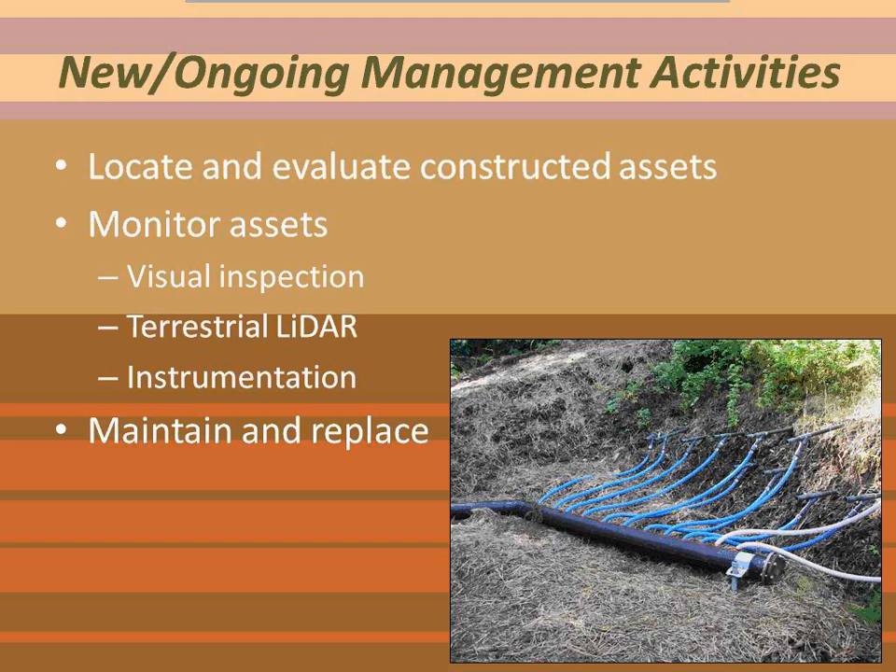So this asset monitoring that we need to do, we're trying to do visual assessments. We're looking at other tools we might be able to use, like LiDAR scanning, for monitoring slopes we haven't been able to program yet. Could we detect deformation that might trigger more proactive stabilization work? And lastly, we recognize we need money to fix a lot of these constructed assets that are now 20 years old and definitely seeing some abuse.

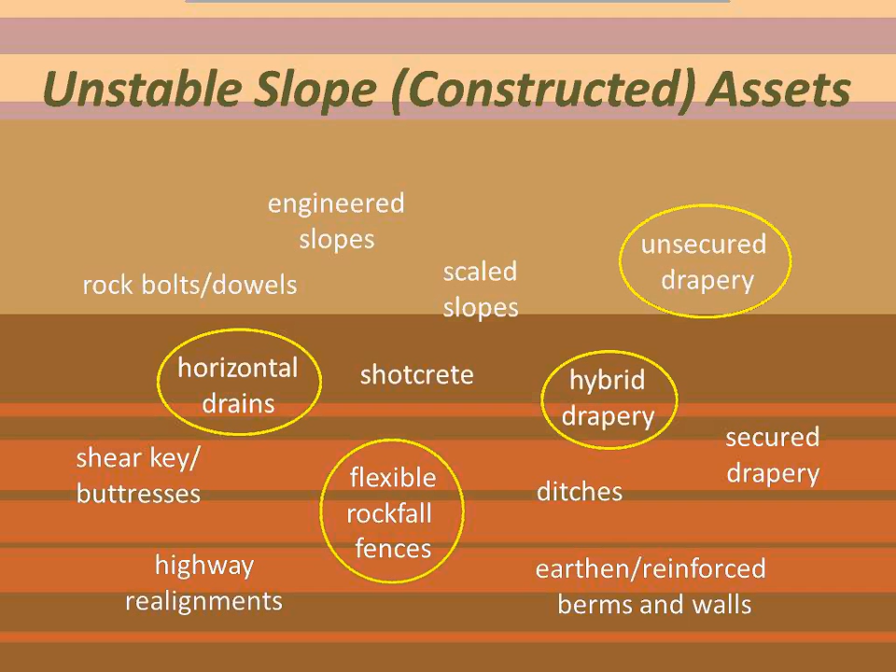This is a representation of some of the constructed assets attached to a slope management program, like bolts, drapery, and cut slopes, and trying to choose which areas we're going to focus our assessment on in terms of performance. We've picked four right now that we're talking about focusing on.

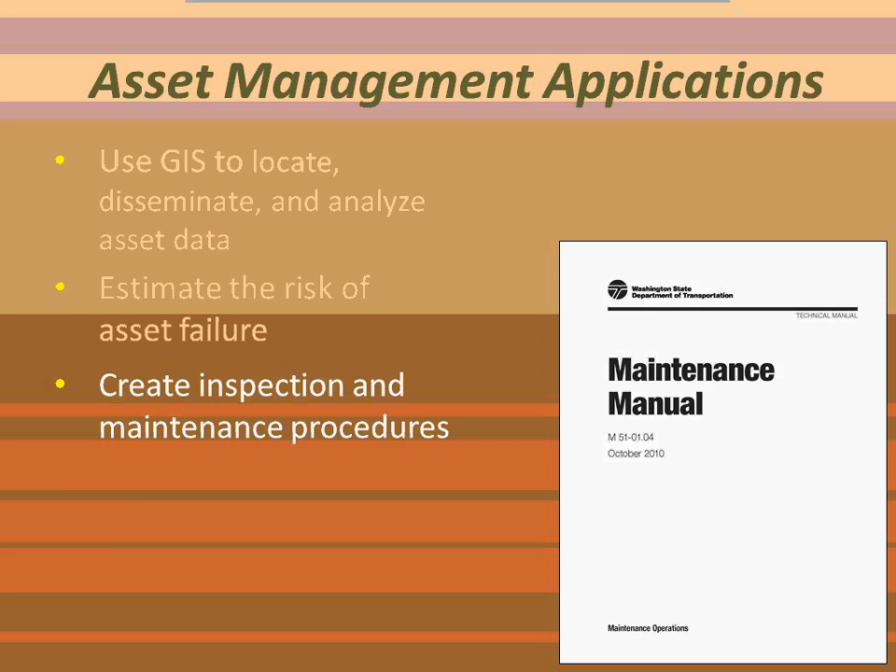The first one is horizontal drains, recognizing those are quite critical in terms of functionality if they're going to do what we need for slope stabilization. Same thing for draperies, trying to make sure those assets are functioning as intended. I'll run through some of these things quickly.

We're working with our maintenance folks to try to develop maintenance procedures around these, and we're just finishing up one for horizontal drains. And then trying to document the maintenance activities that we are doing—that's a really important part in terms of trying to learn from our efforts.

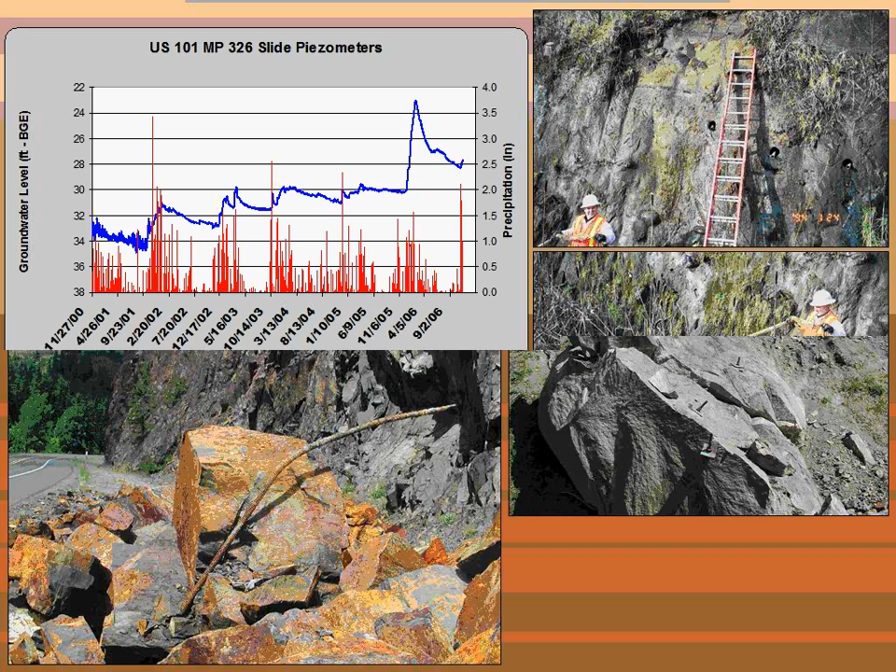So just some photos here—a lot of these are draperies and rockfall fences we've had problems with. These are earlier versions, so we've learned a bit from some failures and high load conditions these have been exposed to. Same thing for rock anchors—we've learned about some early deficiencies in our designs and are trying to make changes to those.

This is some data on horizontal drains from a system that's been in for 5 or 6 years, where we can see clogging of the drains and increase in piezometric surfaces within the landslide, recognizing we need to maintain these systems if they're going to function. And then just using terrestrial laser scanning to look at shotcrete performance and measurement of shotcrete applications.

I'll close here with these lessons learned. We're seeing that a lot of these lower cost mitigation solutions are being favored over more costly ones. It raises the question—are we fixing the right ones? Are we fixing the most critical ones? I think there's some discussion to have about that.

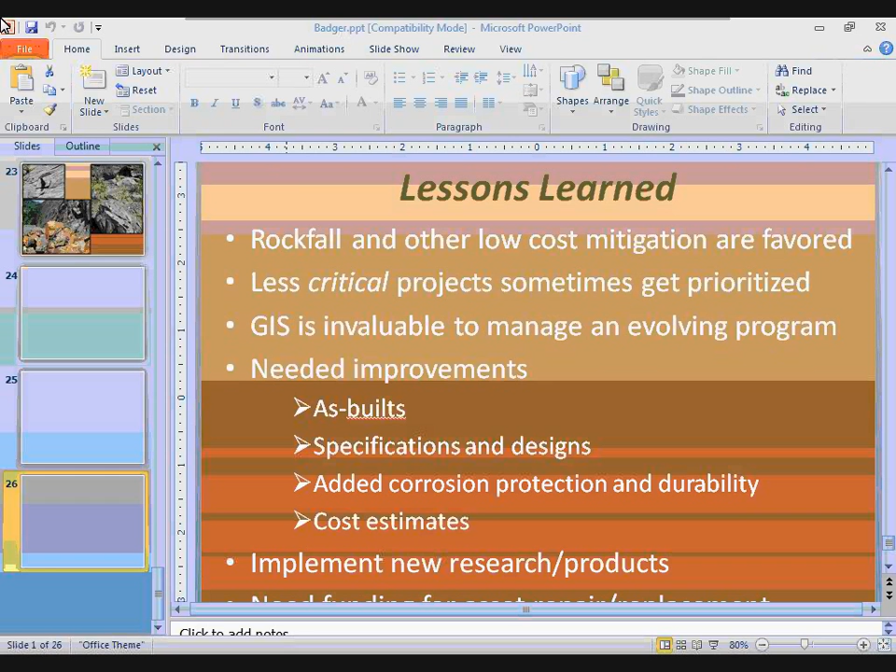We recognize how important GIS has been and needs to be incorporated into an evolving program. Some of the improvements we're working towards are really trying to capture what we're building and get better as-builts, improving specs and designs, trying to improve corrosion protection so we get more performance life out of these systems, doing better cost estimating, implementing new research projects, and again trying to find money to repair things we've built.